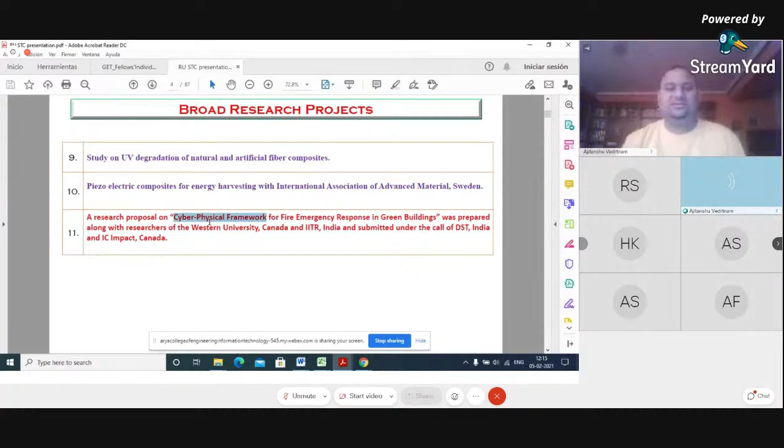What we'll be doing is incorporating certain sensors. We'll be creating a model where automatically, if we have any indication of fire in the building, we'll get the input and can begin corrective action that is needed. We'll be doing it with Western University Canada and IIT Roorkee, with one professor from IIT Roorkee also involved. If it is approved, we'll be doing it.

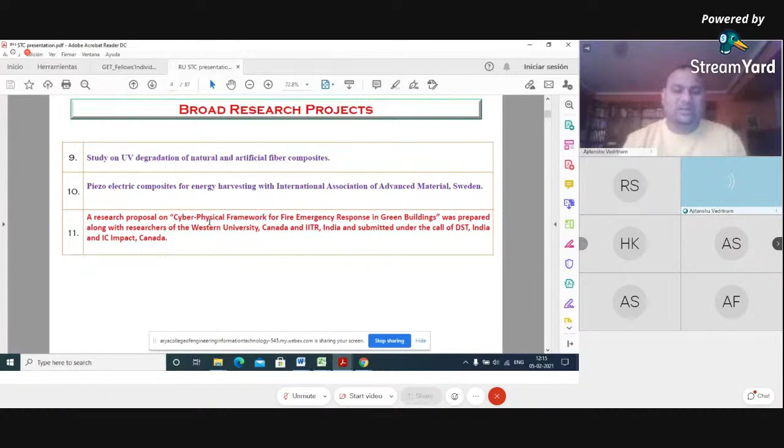So these are the projects on which my research group is currently working. Now I'll give you a brief idea of how it is being done, covering one or two projects as much as time allows. I'll first talk about the research on glasses, and then about the multiple other researches we have done.

The first project I'm going to cover is about developing fire retardant laminated glasses and improving the load bearing ability of glasses in extreme conditions. Extreme conditions like in aircraft involve continuous fatigue, creep, and different complex loading being applied. So we are working on that.

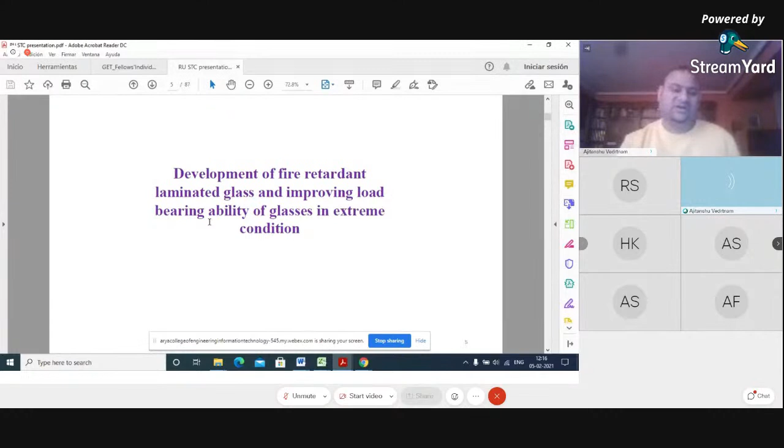For this project, four countries are involved. We have the experimental program here in Spain and in Canada, and numerical modeling from one of the groups I was part of while in India. I was involved in the numerical modeling, and we are already near completion of this particular project. This is the professor from Italy who is working with me on the numerical modeling.

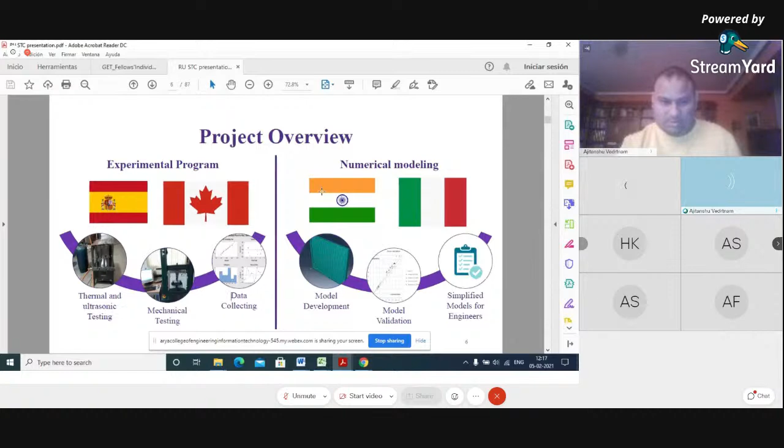They state guidelines on what to do and not do to avoid such incidents, and what must be the fire resistance of the building or material. But as I belong to India, I'm aware these practices are rarely followed. Very few people test fire retardancy before making a building. They even do illegal construction, which causes fire. So we are also trying to strengthen this National Building Code of India.

This is about fire, how it occurs, when we talk about compartment fire. There are two kinds of fire: one is like fire in jungles, such as in Australia. We are not working on that kind of fire. We are working on compartmental fire, that is, fire within a structure, inside a building or a room.

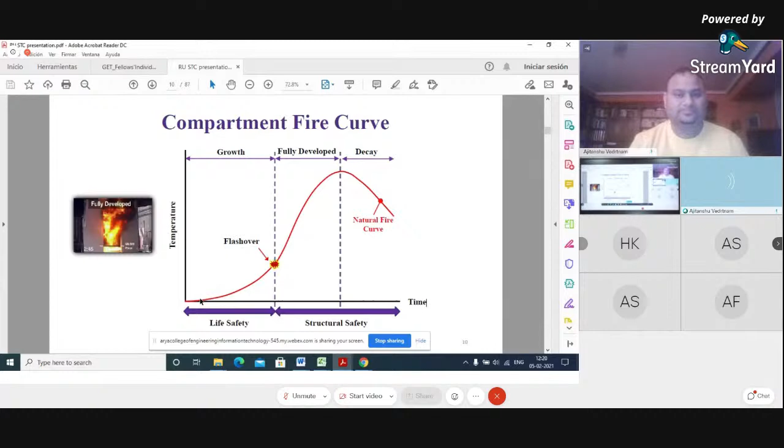So this is the basic testing that we have performed on what kind of strength glasses have once they are in a fire, and we obtained a very interesting result, because, as you might be aware, the glass transition temperature is very high. We tested it, communicated these results to a journal, and they are published. Glasses never fracture because of high temperature alone. Even at 500 to 600 degrees centigrade, glasses can withstand it if they are

uniformly heated. Uniformly heated means if there is a window and we have a fire, and the complete window has the same temperature, it may not break. But due to thermal gradient, any glass structure, any building material, specifically glass or laminated glass, does break, because there is a gradient across the length of the glass. If there is a gradient of even 150 to 200 degrees centigrade, the glasses will start breaking. Even if they have a uniform temperature of 500 degrees centigrade, they'll not break.

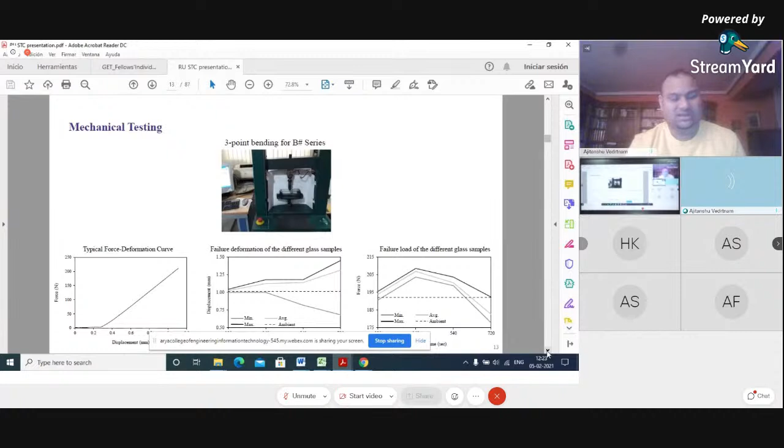So these are the results that we have identified, and we have worked accordingly on uniformity of the temperature on the glass. We have incorporated certain treatments for that, and we were successful in our intent to an extent. So this is what we have done: mechanical testing post fire, before fire, and in general mechanical testing. This is a 3-point bending setup for load bearing ability that we have evaluated.

And we need to think of how glass is made. It is a very basic float process which is used for making the glass. You all might be aware of it. For soda-lime-silica glass, we melt the raw materials and it is floated, and that floated material solidifies even before recrystallization of the grains, and we get transparent glass by this process.

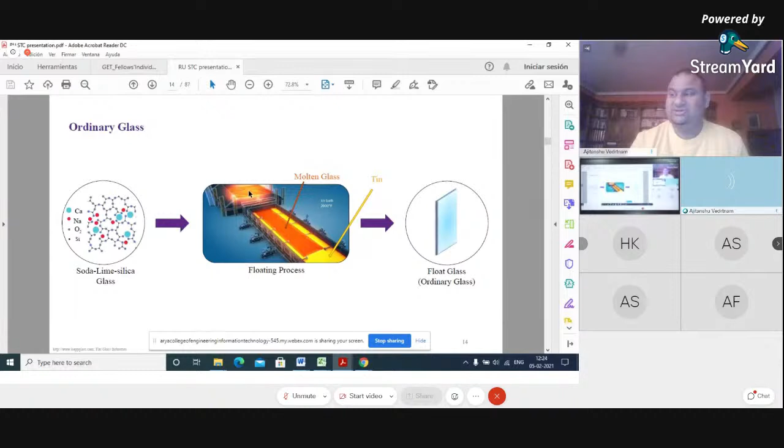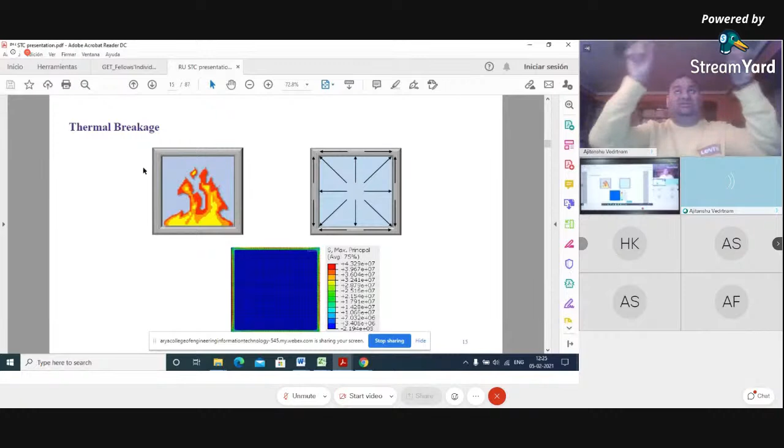So we have tested how much temperature a glass can bear without the restriction, and how much temperature a glass can bear with the restrictions or frames. And we have found these results.

You can see in the first case, once there was a restriction or a frame to the window, the glass was broken after 60 seconds. But once there was no restriction around, and we kept the temperature rising from 0 to around 270 or 280, the glass was broken after 100 seconds. So you can see there is a significant increase in the time once there is no structure and no frame

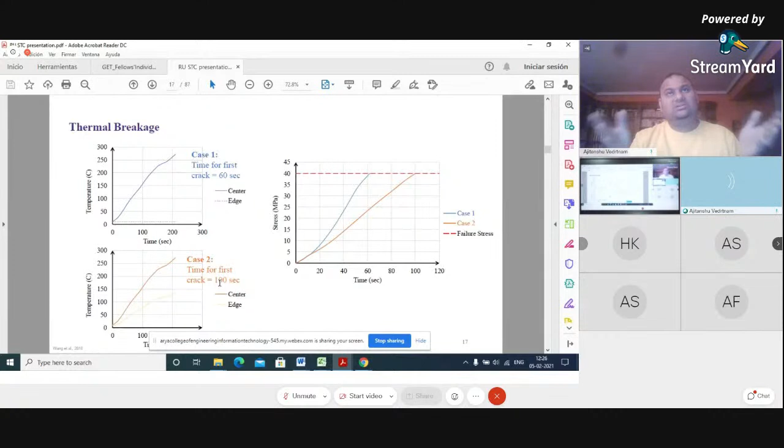around the glass. So actually these experiments are conducted to understand the behavior of glass once they are subjected to fire, because ultimately what we need to do is make a glass which is fire retardant. So we must understand what is happening within the glass so that we could start thinking about what should be done on the surface of the glass or within the glass, so that this phenomena can be avoided, this phenomena can be delayed, and we could have a fire retardant glass. So these experiments were conducted in order to have this information.

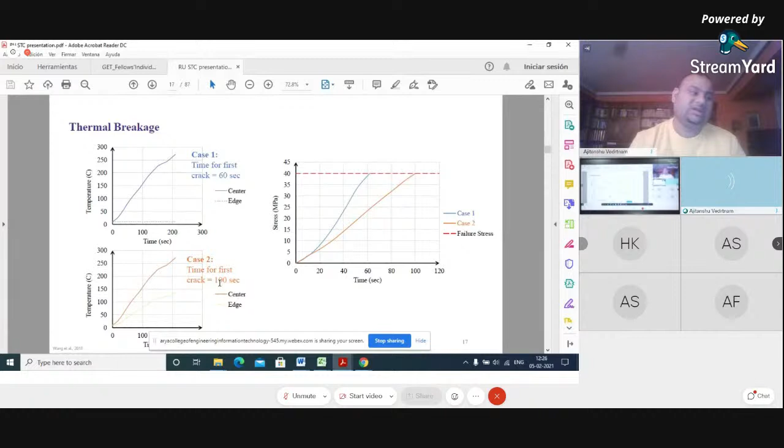So we got two very vital points. One was glass does not break due to the temperature, it breaks due to the thermal gradient across the length of the glass. Second, if we restrict the thermal expansion of the glass, it starts breaking. Otherwise, we have time and it will not be breaking soon. So these were the two points that we have obtained from our experimentation on the glasses, and we worked on it.

For modeling, glass is a complex material because it has surface flaws, minor cracks which cannot be observed, and those residual stresses, environmental conditions, surface flaws, non-uniformity of the glasses cannot be modeled. It is very difficult to model this behavior, and we have tried to model it with the Biot number. And the Biot number, of course, you might be aware, gives information about the flow of heat within the solid. If we want to predict the heat flow in a solid, we can do it by application of the Biot number.

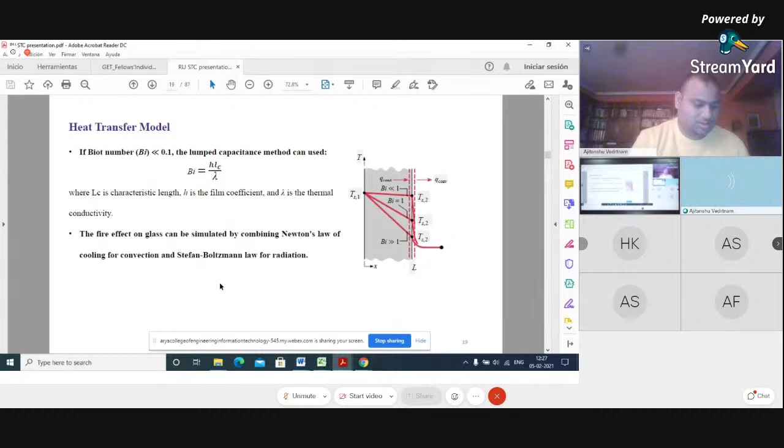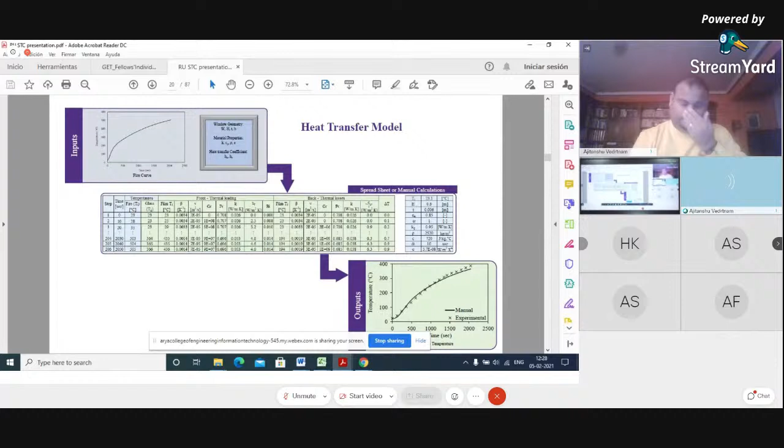Okay, so we have tried to do this modeling. I'm not going to go into the detail of the calculation that we have done. We somehow replicated a fire, we measured the heat transfer within the glass using simple thermocouples, and we calculated that through our model as well. And the model was working well up to 90%. Okay, so these are some outputs of the model. I'm not going into the detail because it is a complex calculation. It might not be that useful.

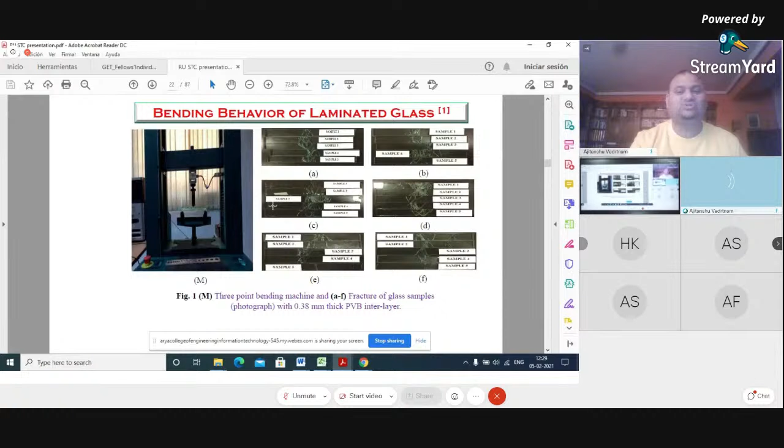Now we were into creating glasses for extreme conditions. The first step is to evaluate the available options. So we have evaluated the load bearing capability of all commercially available glasses in order to improve them. Of course, the first step of any investigation should be to evaluate what we have exactly in the market. So we have evaluated the load bearing capability of all available options in the market, and we have analyzed which is better and which is not. So later on we could do something with the best available option in the market so that our developed product can be marketable.

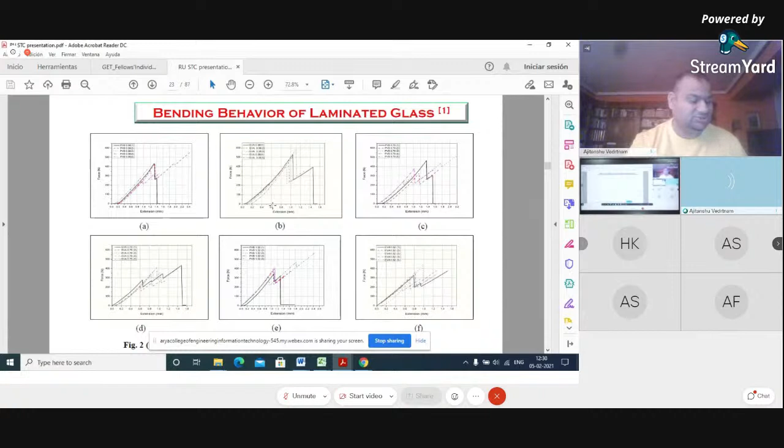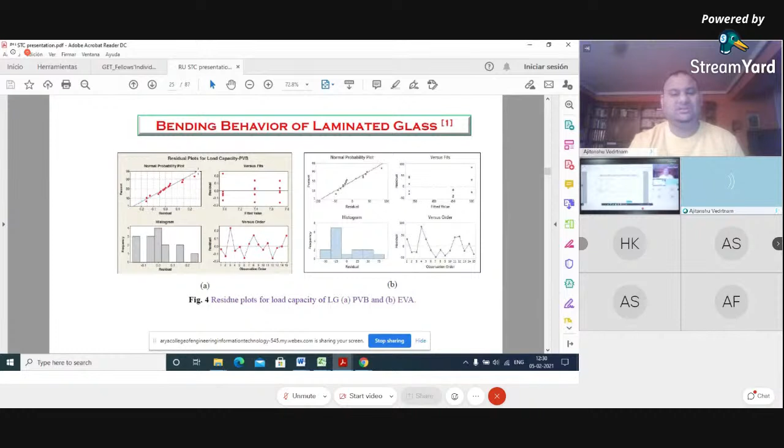These are, of course, a very essential part of any experiment, that is the statistical analysis that we have conducted, and we have found that the data was following the pencil thickness test shown in the residual plot. So the data was normally distributed. Our results had limited error. So these are some output results which we have already, like there is no